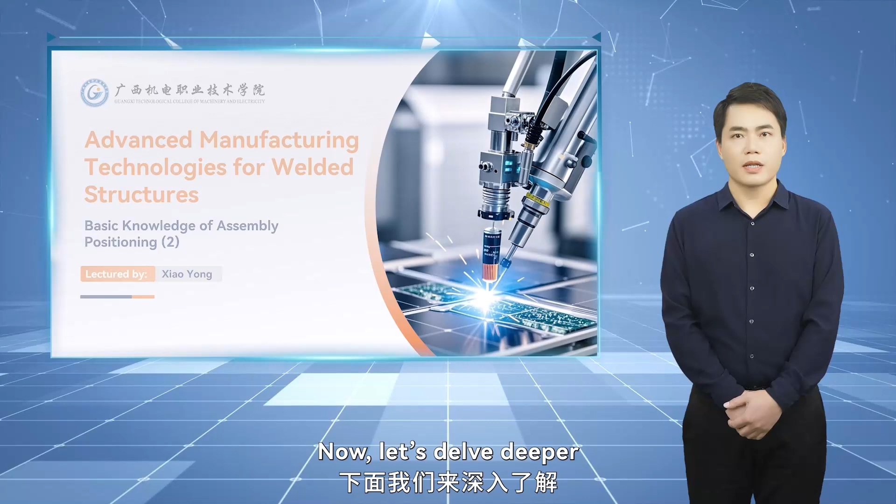In the previous session, we studied some foundational knowledge about assembly positioning. Now, let's delve deeper into the commonly used locators and their applications, considerations when using them, and various assembly positioning methods.

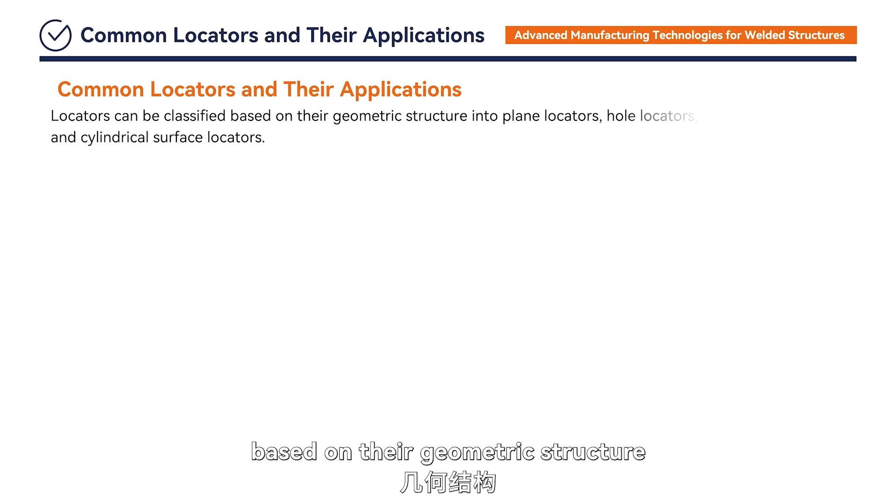Let's first look at common locators and their applications. Locators can be classified based on their geometric structure into plane locators, hole locators, and cylindrical surface locators. When positioning on a plane, stops are used to hold the workpiece on a horizontal or vertical surface. They are simple and commonly applied.

Support pins are also frequently used. Their structure and dimensions are standardized and include fixed, adjustable, and support plate types. Support plate locators can be either smooth or slotted, suitable for vertically or horizontally oriented machining surfaces, and provide stable support for large workpieces.

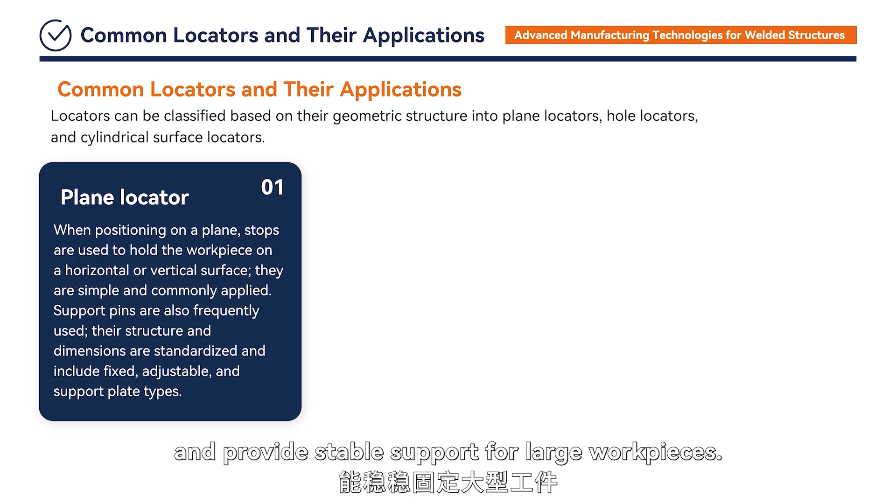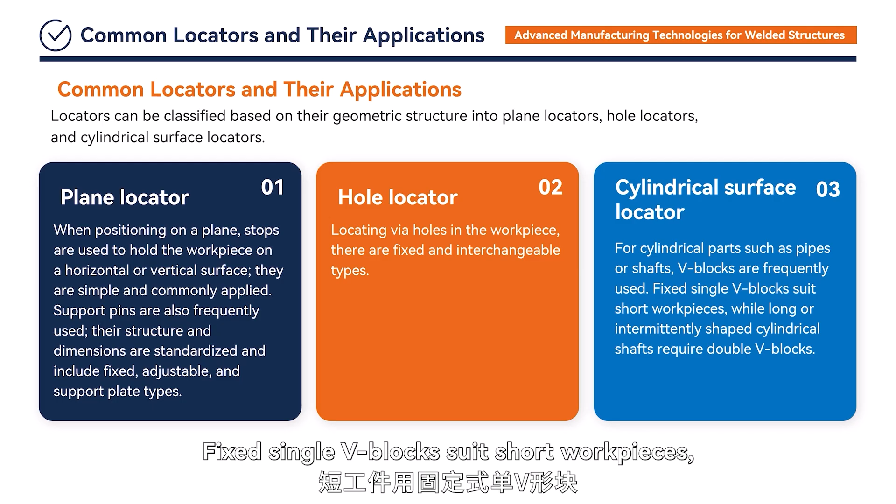When locating via holes in the workpiece, locating pins are essential. These come in both fixed and interchangeable types. For cylindrical parts such as pipes or shafts, V-blocks are frequently used. Fixed single V-blocks suit short workpieces, while long or intermittently shaped cylindrical shafts require double V-blocks.

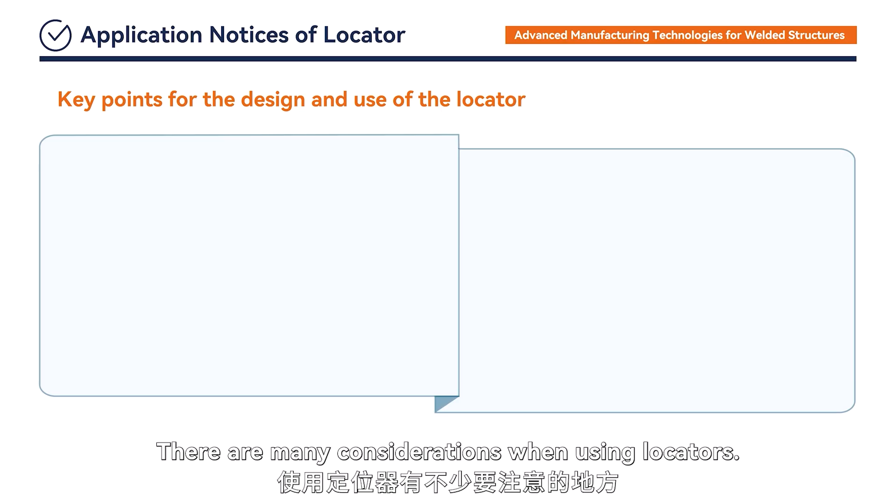There are many considerations when using locators. Generally, they should not serve as load-bearing components, as doing so may affect positioning accuracy. If they must bear loads, their strength and rigidity must be enhanced.

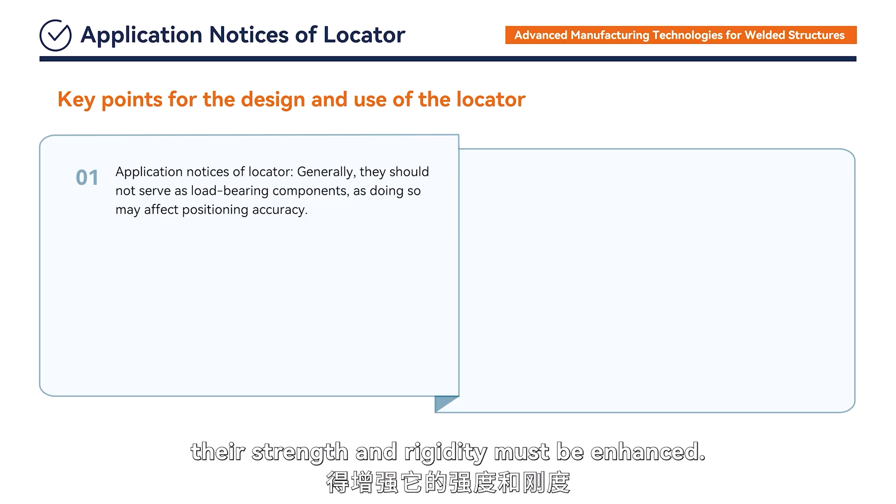Locator placement must not hinder operator tasks and must allow for easy removal after welding or assembly. The working surfaces of locators must be wear-resistant to maintain long-term accuracy, and if worn or damaged, they should be easy to repair or replace.

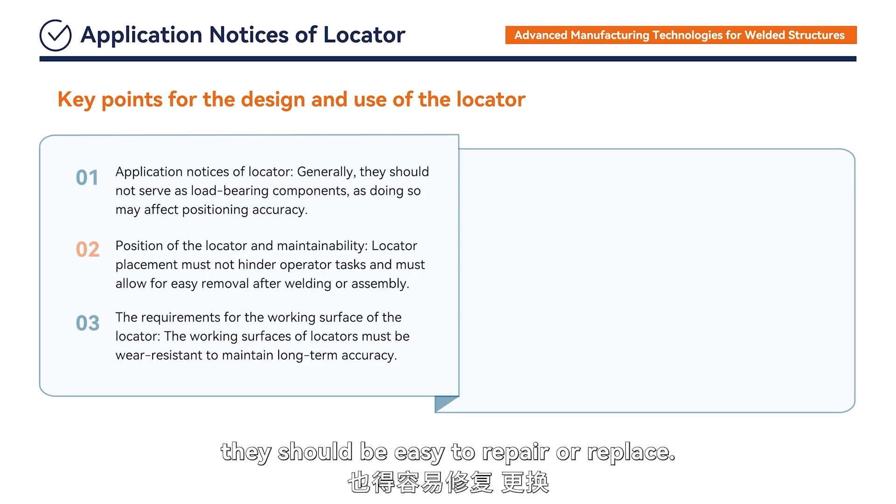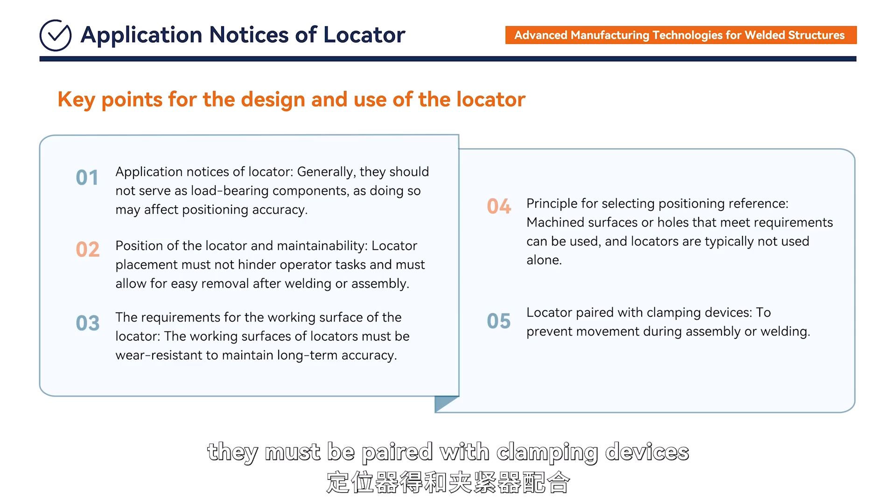When choosing a locating reference, machined surfaces or holes that meet requirements can be used, and locators are typically not used alone. In practice, they must be paired with clamping devices to prevent movement during assembly or welding.

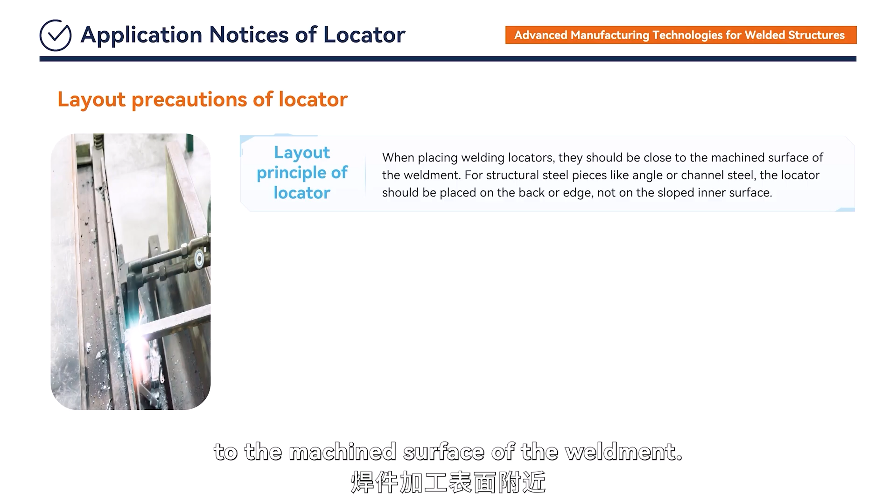Additionally, when placing welding locators, they should be close to the machined surface of the weldment. For structural steel pieces like angle or channel steel, the locator should be placed on the back or edge, not on the sloped inner surface.

The layout must not interfere with cutting or welding operations and should prevent deformation of the weldment. Otherwise, the assembly may become immovable after welding. The locator itself must also have wear resistance and structural stiffness to ensure reliable and stable positioning.

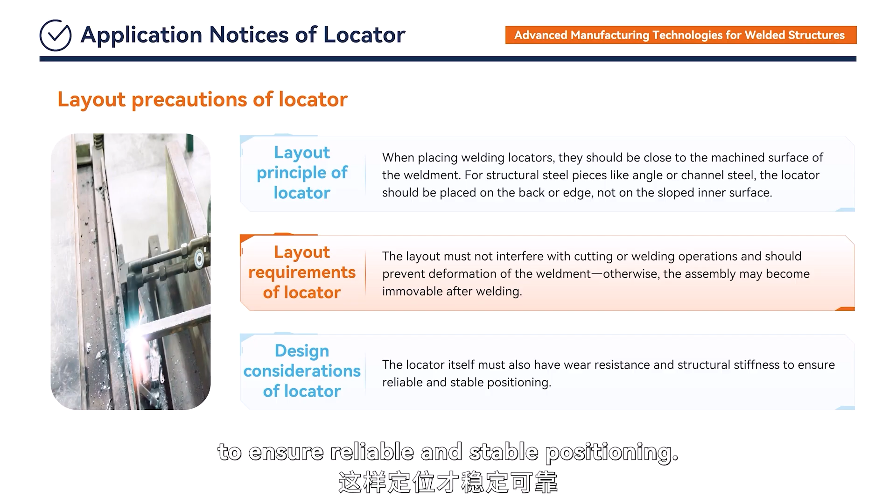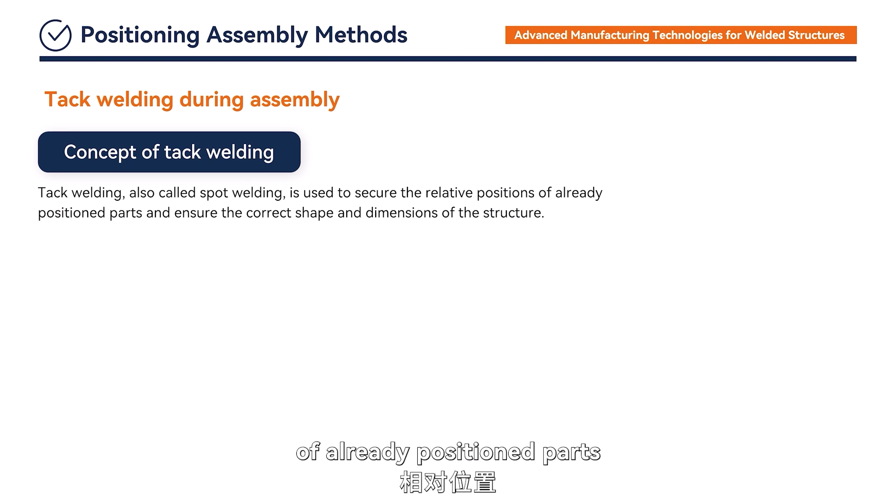Next, let's move on to assembly positioning methods. Tack welding, also called spot welding, is used to secure the relative positions of already positioned parts and ensure the correct shape and dimensions of the structure.

During operation, the correct diameter of electrode or welding wire should be chosen to ensure weld penetration. If defects are found, they should be removed and re-welded. The arc start and end should have smooth transitions.

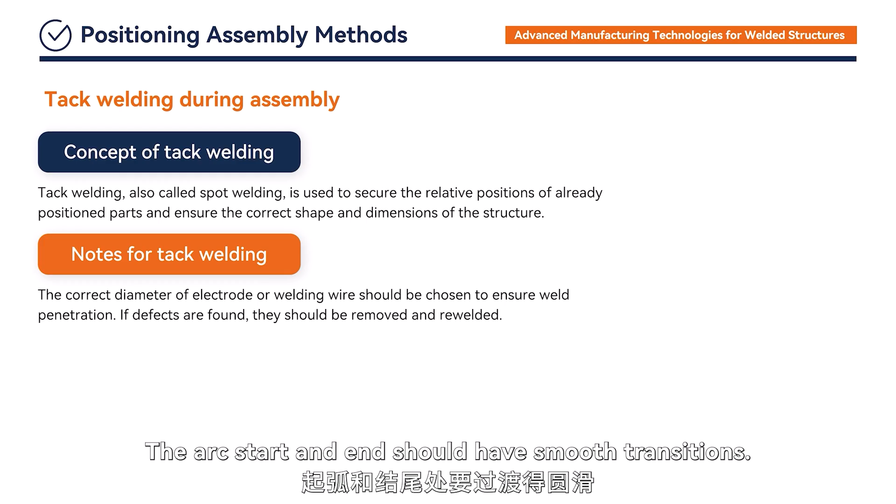The length of tack welds is related to the plate thickness. Thinner plates require shorter welds, thicker plates need longer welds, and the spacing is determined by practical conditions.

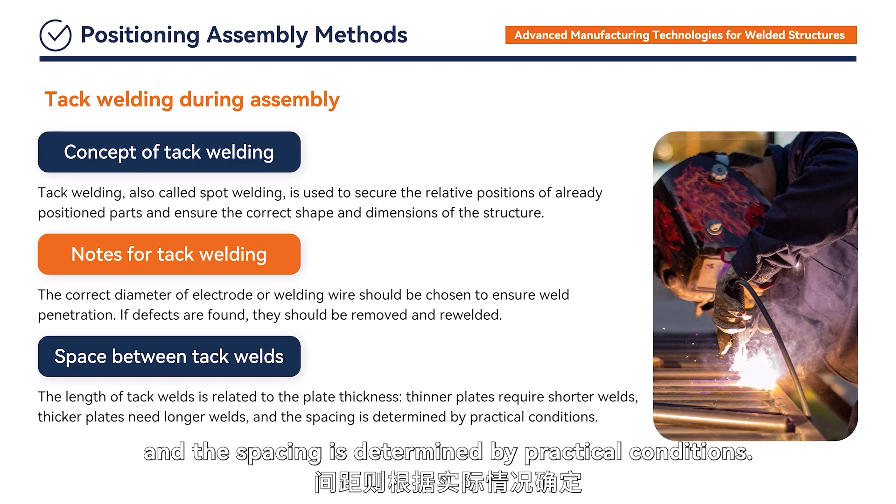Scribing on the surface of the workpiece or assembly platform, such as center lines and joint lines, helps to determine the correct position of components before fixing them with tack welds.

A support seat, consisting of a base plate, channel steel, side plates, and stiffeners, can then be used to assemble the structure following the scribed lines.

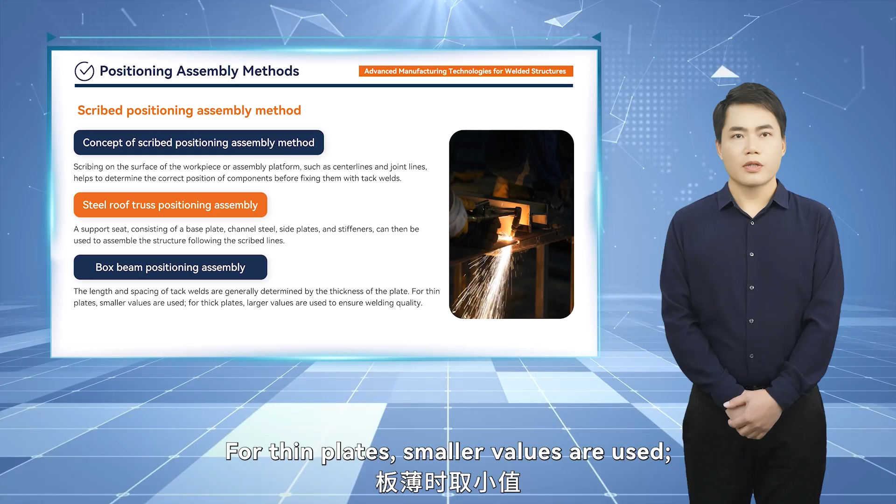The length and spacing of tack welds are generally determined by the thickness of the plate. For thin plates, smaller values are used. For thick plates, larger values are used to ensure welding quality.

The template positioning method uses a template to determine the position and angle of the part. After clamping, tack welding is performed. This method is suitable for assembling steel plates at specific angles and installing pipe nozzles on containers.

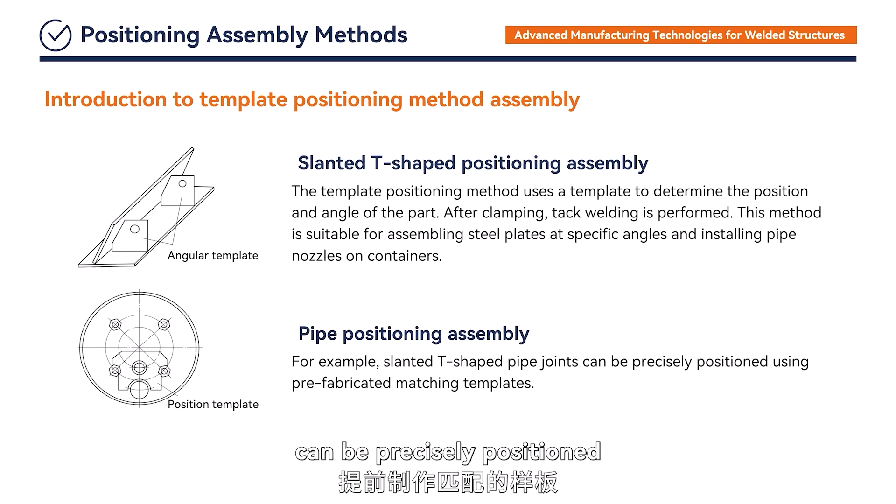For example, slanted T-shaped pipe joints can be precisely positioned using prefabricated matching templates.

The stop block positioning method uses specific locating elements to determine part positions. Components are clamped and assembled without the need for scribing. This method is efficient and provides high-quality results, making it suitable for batch production.

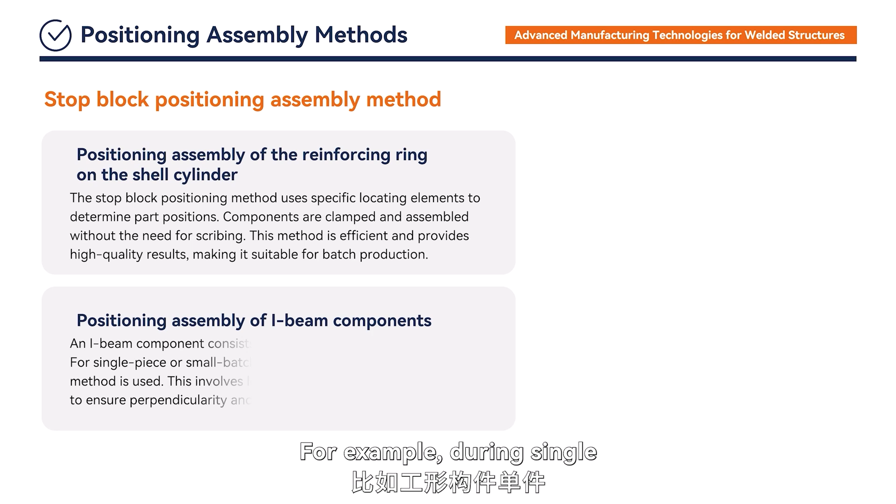For example, during single or small batch production of I-beam components, leveling and scribing are performed first, followed by welding stop blocks to ensure verticality and correct positioning.

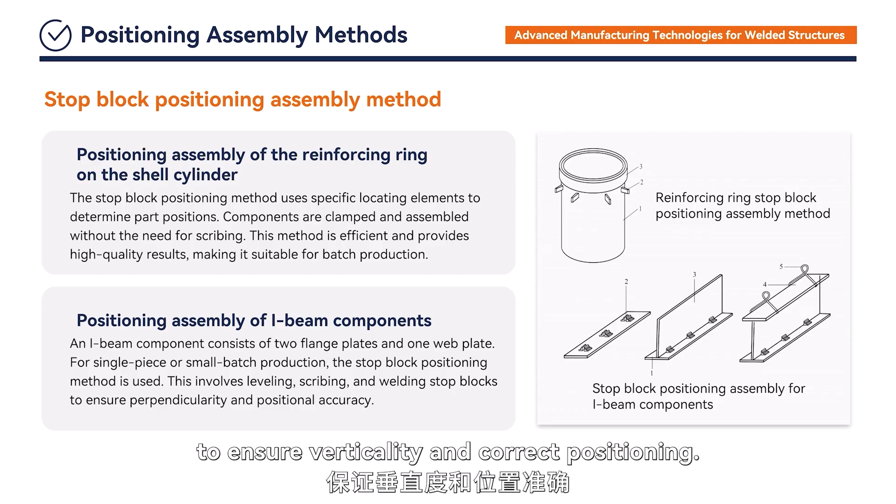The fixture-based positioning method, such as the assembly of a double-arm angular lever, involves determining positions using pins and locating dowels, adjusting height with shims, and completing the assembly with clamping and tack welding.

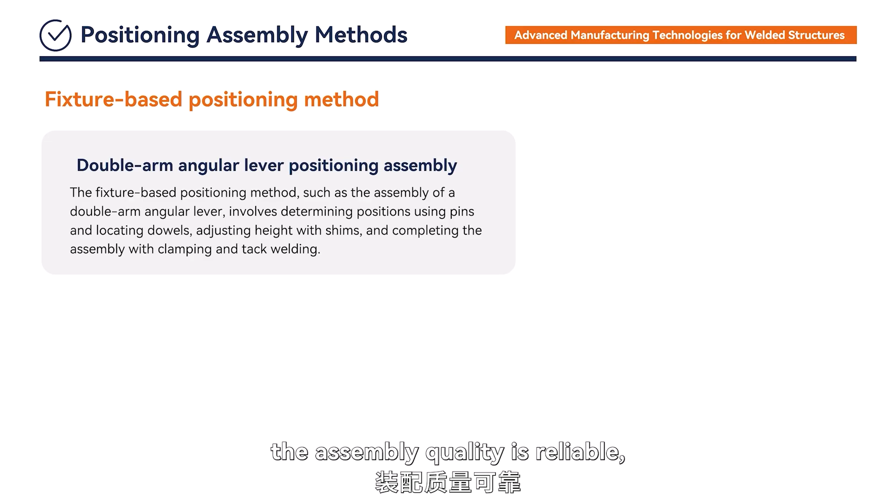When positioning is entirely handled by fixtures, the assembly quality is reliable and production efficiency is high. For batch assembly of I-beams, simple fixtures can be used in combination with stop blocks and shims to determine position, secured by screw clamps and verified with a square, efficient and accurate.

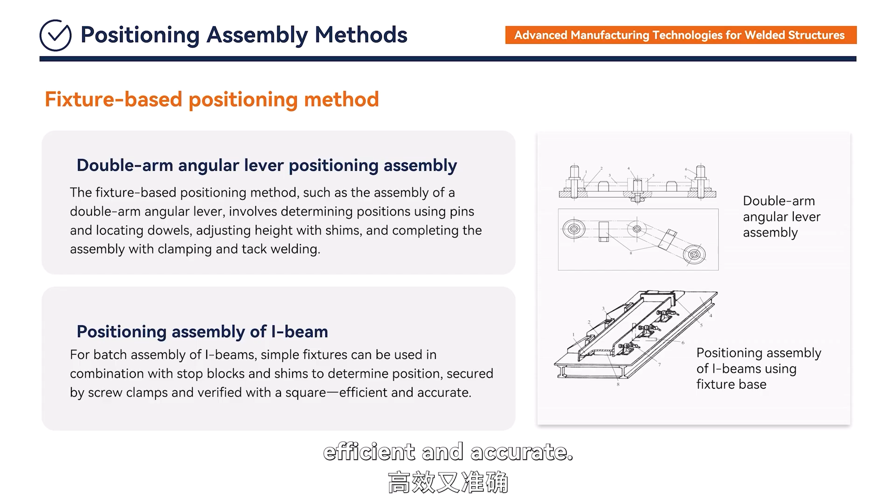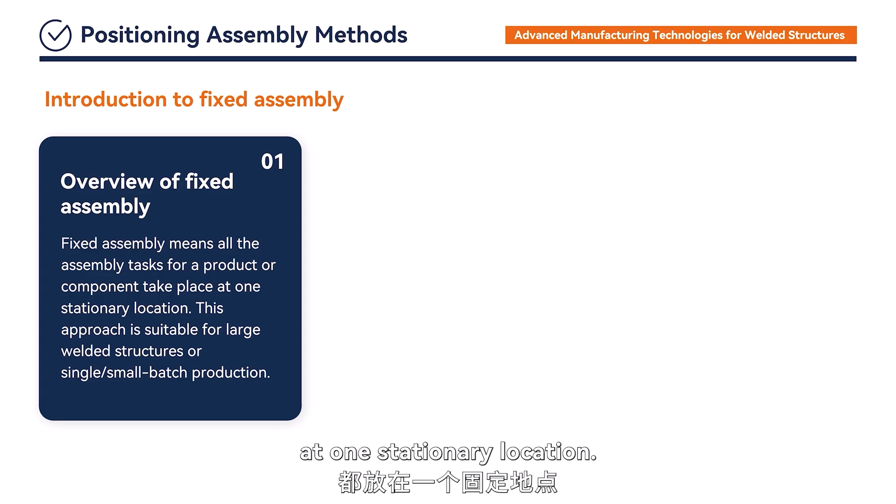Finally, let's talk about fixed and mobile assembly. Fixed assembly means all the assembly tasks for a product or component take place at one stationary location. This approach is suitable for large welded structures or single or small batch production, such as the on-site installation of large spherical tanks. Installation process of spherical tank.

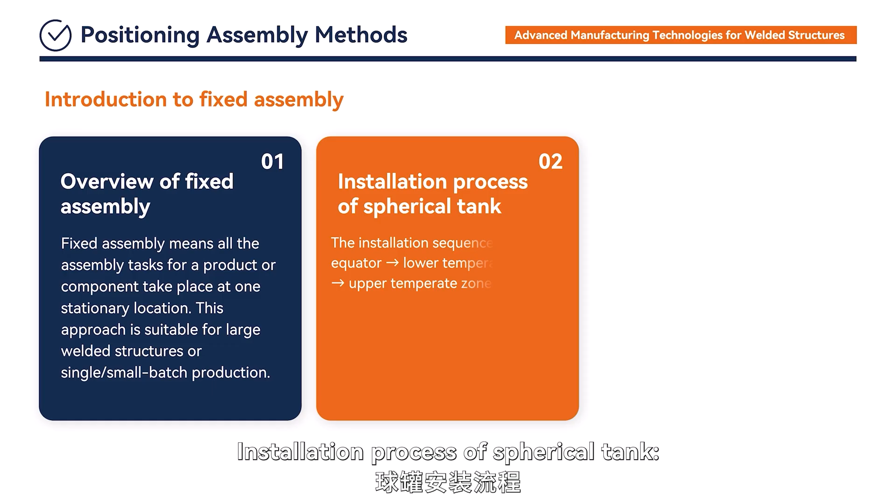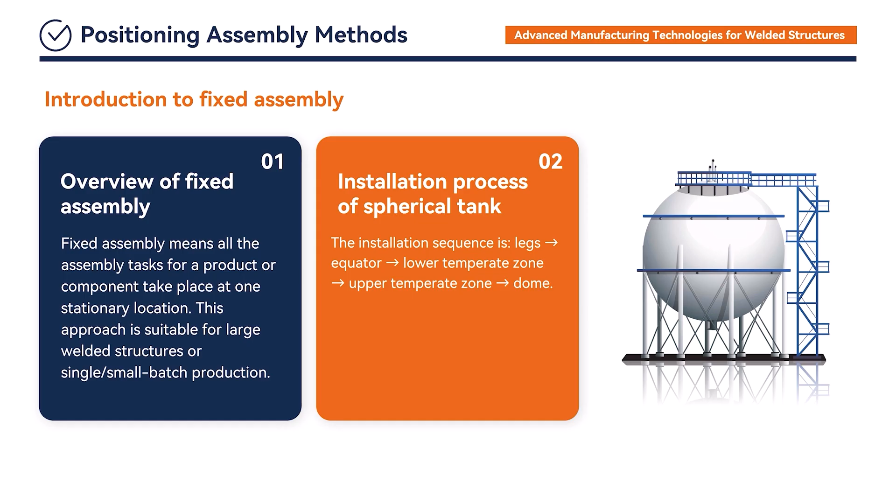The structure of a spherical tank includes the equator band, upper and lower temperate zones, upper and lower domes, and support legs. The installation sequence: legs, equator, lower temperate zone, upper temperate zone, dome.

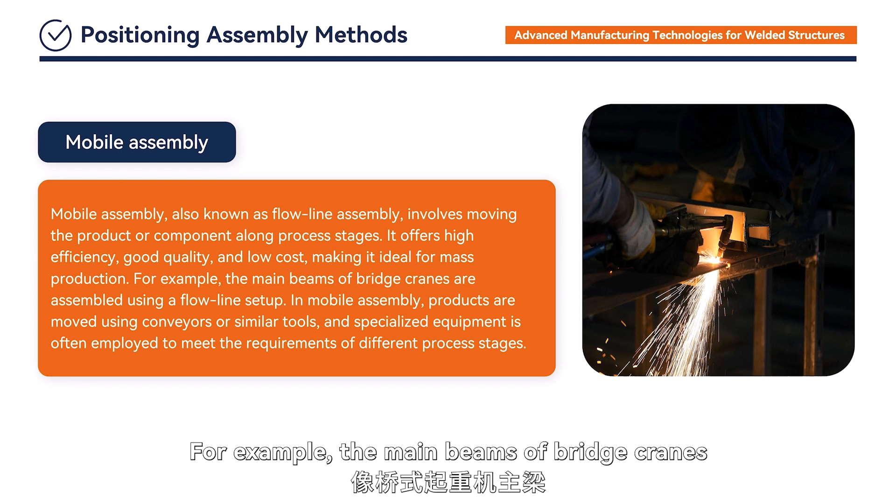Mobile assembly, also known as flow line assembly, involves moving the product or component along process stages. It offers high efficiency, good quality, and low cost, making it ideal for mass production. For example, the main beams of bridge cranes are assembled using a flow line setup.

In mobile assembly, products are moved using conveyors or similar tools, and specialized equipment is often employed to meet the requirements of different process stages.

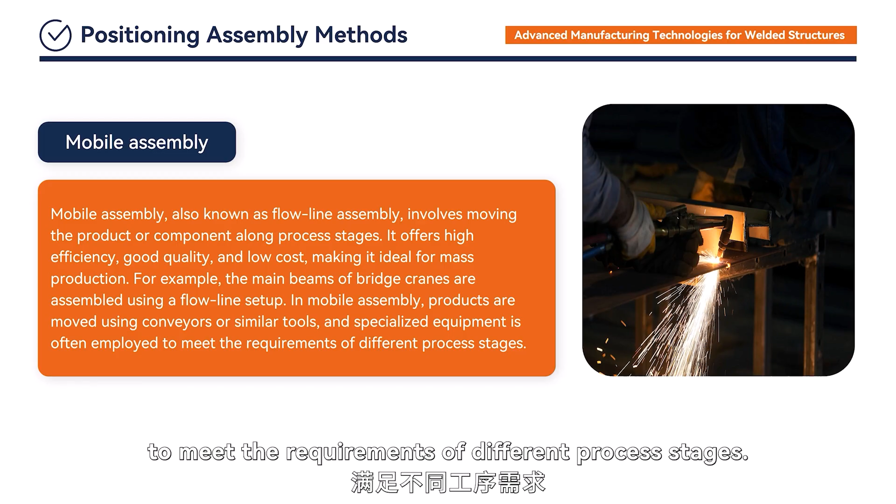The content covered today is highly relevant to practical manufacturing. Please review it carefully after class and feel free to ask questions. I hope everyone gains a solid understanding of these concepts and builds a strong foundation for future learning and work.